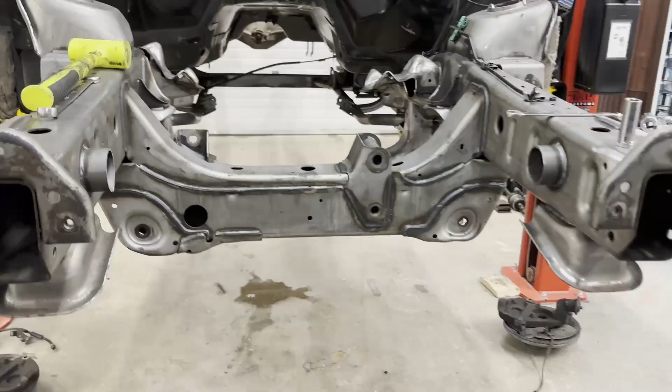The motor and transmission can go in for good. And by good, I mean I'm sure that motor's going to last the summer. But... for good this time.

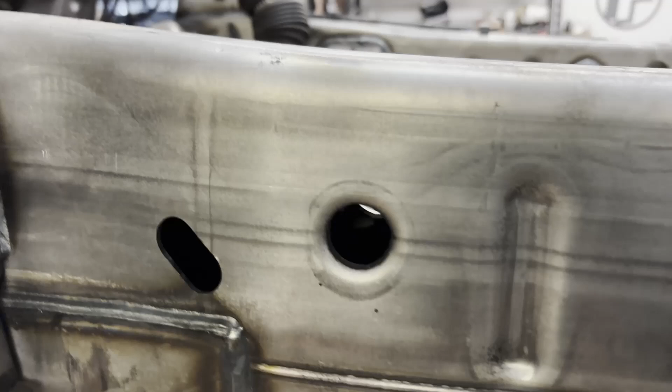So you can see this is all as welded factory steel. Super, super cleaned up.

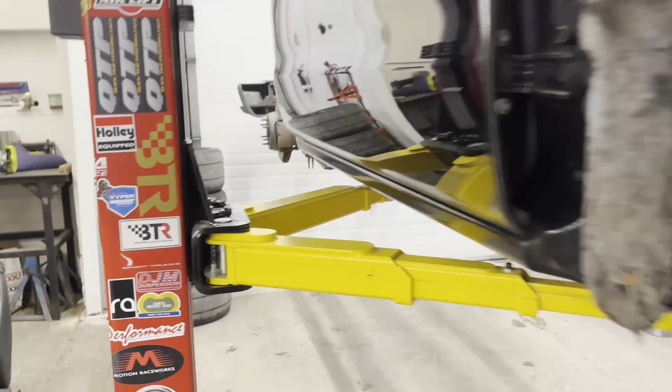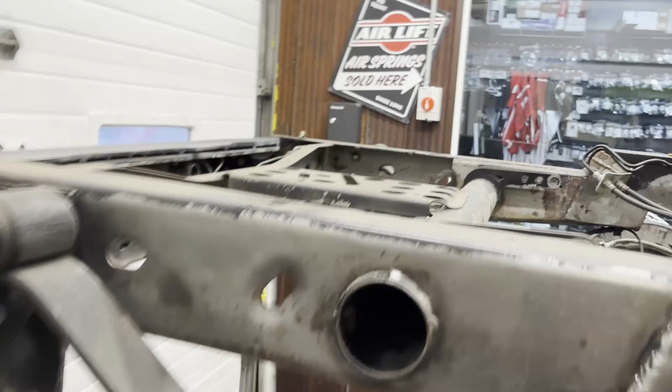Now, obviously we had the bed on when this got blasted, so Carlo wasn't able to get on the top side of the rails, but that's totally fine because about the first winter that I did not drive this truck, I stripped the entire back half by myself and spray painted it. So aside from this little spot here, which is just crusty, this should just sand up really nice and come off. That's pretty much the best case scenario in that. Obviously he wasn't able to get the tops of the rails, which is a problem because thanks to the cage in this unit, this cab is never coming off. So unfortunately that will be like that for the remainder of this truck's life, but it is what it is.

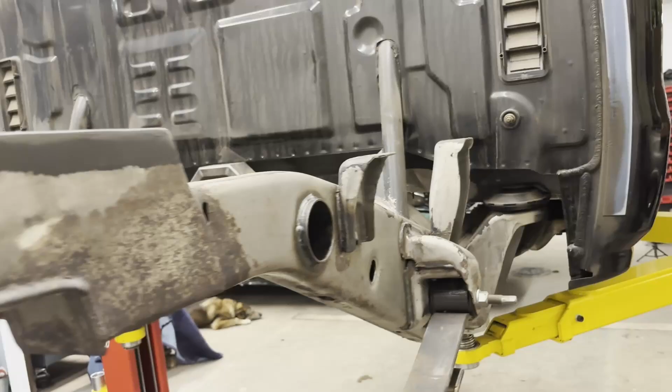Could be much worse. Let's clean the rest of the way now, and we'll show you the floor, which is currently my favorite part. Dun dun dun dun. Well, bam. Look how clean it is. Remember how oily it was, and gooey? This is all the factory E-coat, and it's dry. I mean, there's the tiniest little bit of residue left, but it's dry, it's clean, it's not gooey. I can quick detail this if I really wanted to. That's all just dust from the blasting.

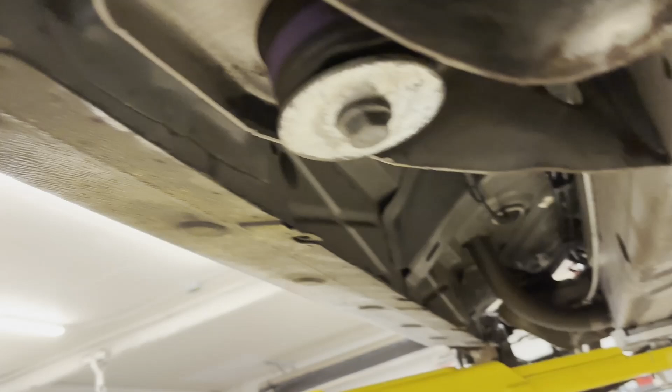So, same here. I'm so happy with this. You got all up in the rockers and everything, so this thing's like brand new again. Aside from a little bit of cleaning and painting, this is the best case scenario I could have asked for.

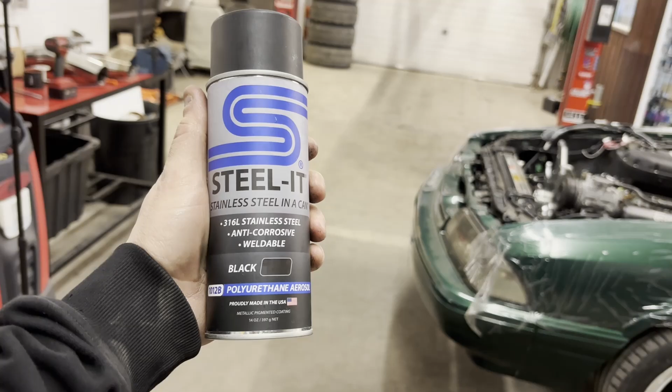So I posted a question on my Instagram stories quite a while ago, asking what aerosol coating to use. And I was bombarded with answers of Steel-It. I'd never heard of it before. Apparently I've been living under a rock because I had 40 or 50 people message me about it. It's incredibly expensive, about 50 bucks Canadian a can, so like 30 odd dollars US. But it has, I guess, stainless steel in it, and it's weldable through the coating. I don't know that I would ever try that, especially with a TIG welder, but it comes highly recommended.

I don't know what my exact game plan is, other than I'm going to try and take this thing apart as much as I can. Hey, look at that, that's from when the CV shaft blew apart. That's fun. And that's from when the other one blew apart.

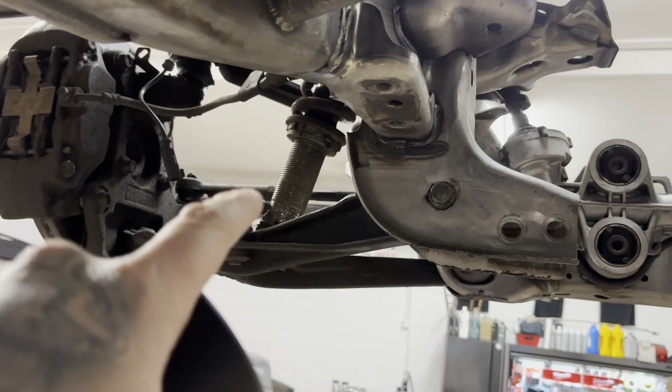So I'm going to take out the front suspension, all of it, disassemble the coilovers. The springs are going to get coated. We're going to clean the shock bodies. The upper mount's going to get coated. The rack's going to come out and get cleaned. Spindles are going to get coated. The brakes are actually painted out of a gun, they're just filthy right now because of the coating, but they are color matched to the car. So those are going to get cleaned up.

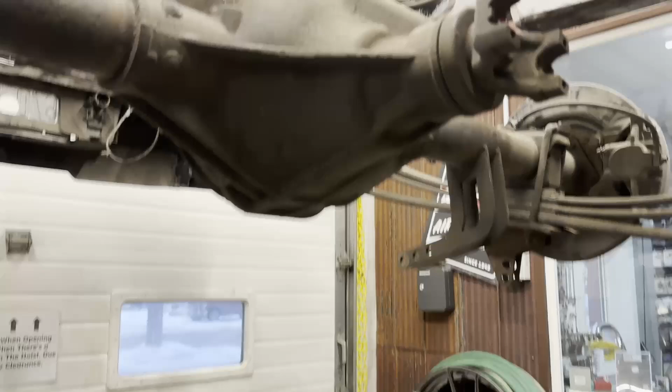This differential, I obviously did not have Carlo blast it because it's not going to be used anymore. So I've got the Ford 9-inch to pick up, I hope, this weekend.

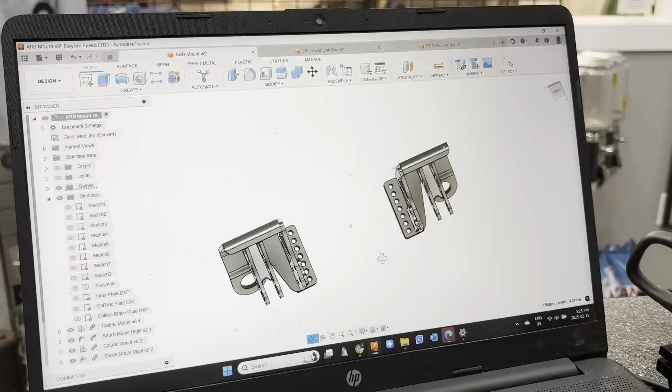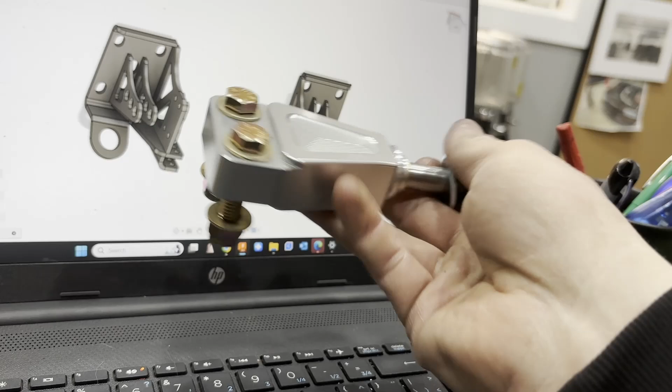And I've also been doing some drawing. I made some anti-roll bar / leaf spring mounts / spring pads, anti-roll bar, shock mount type thing. Basically, picture these being as wide as the diff is - obviously they're far too close right now. This is where my CalTracs are going to bolt on, so we'll have some adjustability there. This will be the new shock mount, which I have these billet shock mounts from Funkhauser race cars to use. So those will bolt into these slotted areas right here, so we've got some adjustability there.

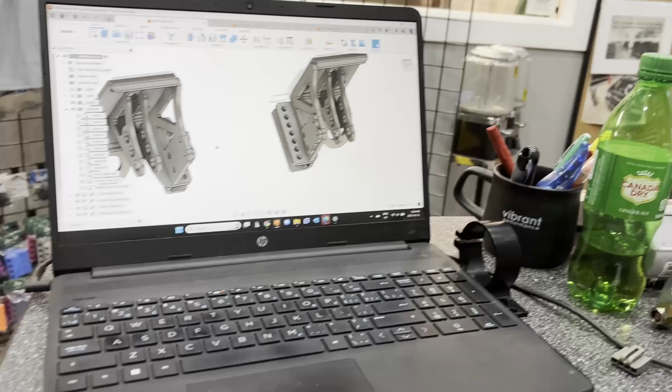And then we'll have a tube that welds to these plates that comes across the diff, and we'll have these mounts attached to that bar. This will be the anti-roll bar, which will then have these sway bar end link type billet pieces that will then have an adjustable bar that goes up to the notch. We're going to remove this cross member here, and make a new DOM tube one that goes across the notch. That's how I'm going to mount the shocks this time - this will be the third shock setup in the rear.

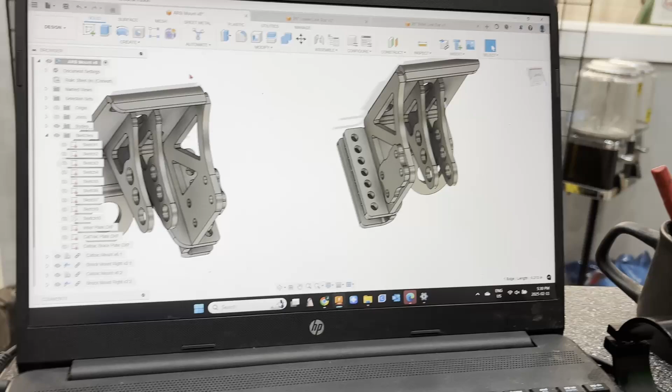So I'm hoping to have these this week and get them coated up, welded up, coated, whatever. Get everything in the truck, be able to make that rear anti-roll bar. Get these billet mounts on, this billet, that billet, all the billet.

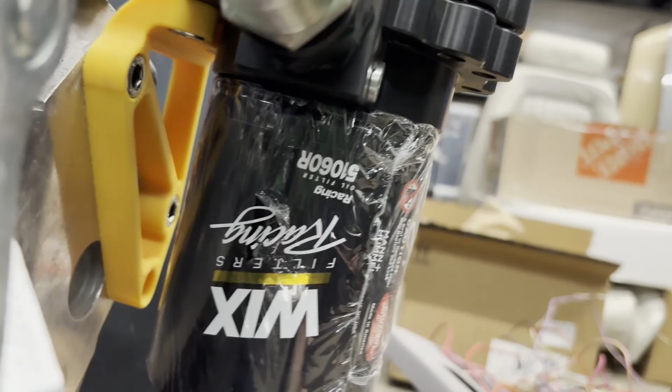What else do I have to show you since we've talked last? I drew our mount for the Clearview filter setup. This is a 3D printed plastic version, obviously, but it's just a proof of concept design that I had. So it's out at Craft Cloud getting 3D printed in China - hopefully I have it pretty soon.

Yeah, okay, I think we're all caught up. All right, teardown time, I guess.

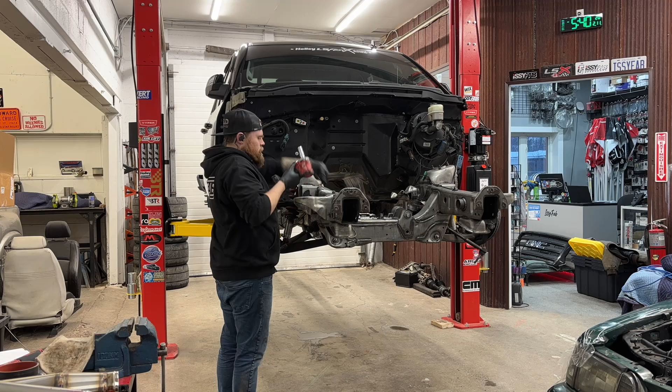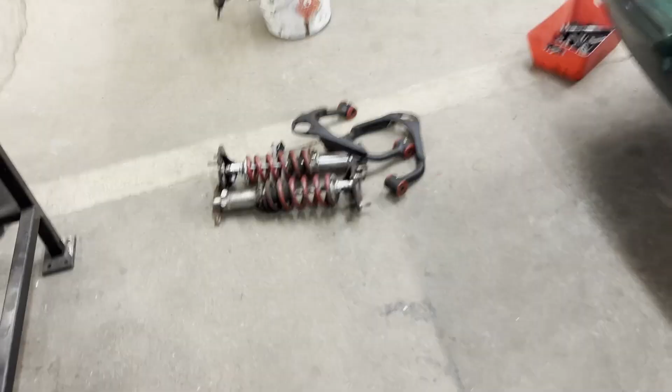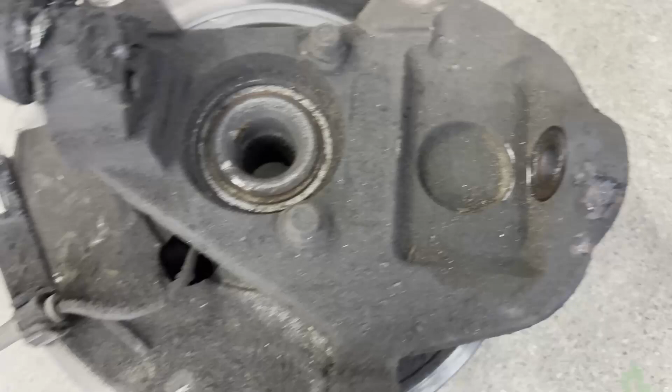I gotta say, I hate doing this, but I'm really glad we're doing it because everything is so bloody gooey. Look at that - that's from one CV shaft exploding and various greases. Control arm's the same - I had drop arms in this thing for a while, but the stock arms have been on it for the majority of the time.

And yeah, the coilovers are pretty much smoked. These aren't even the ones that I used to use - I actually bought these used when I had the other 2014. So I'm just going to clean these up as best I can. I'm going to have the upper mounts powder coated, the coils powder coated, but the shock bodies are basically done, so we're just going to clean them up as best we can for the time being.

And I'll replace them before I start seriously driving this thing again. The majority of the nose is apart. I got to take this brake hose off, obviously still in the caliper, but for all intents and purposes, the front is totally stripped.

So I think the only thing I need to do before I can actually tape off - I'm going to do this chassis in sections. The thought is I could paint a section to start the evening. So say I paint this front cradle area tomorrow night. Obviously I'm not going to be able to work on this front cradle area while it's drying, but if I paint it and leave it for a day, I should be able to work on it.

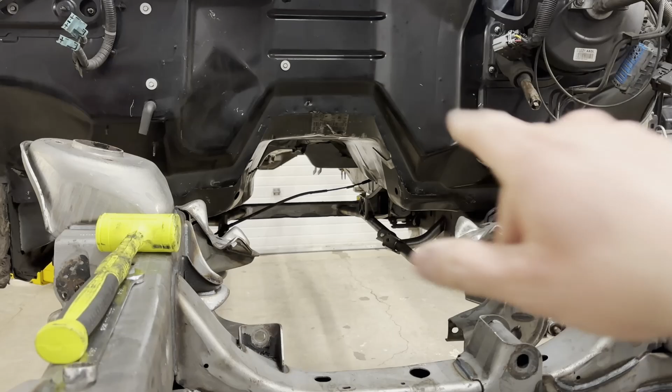Theoretically, if I'm assembling this front end, putting the motor back in, etc., I could paint the next section of frame rail and let it cure for 24 hours while I'm also assembling. I'm hoping this stuff cures okay. I've never used Steelite before, so this is going to be a learning experience.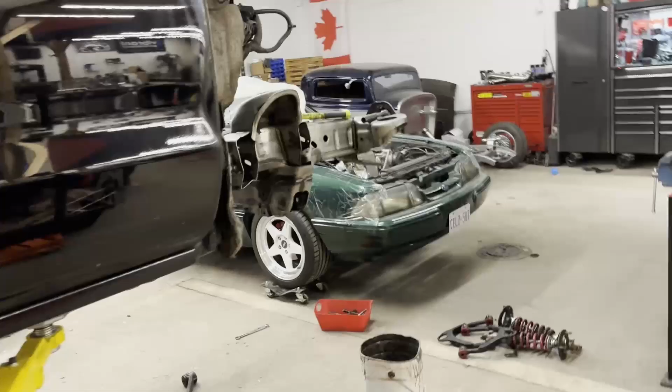But it can't look any worse than what it did. So probably tomorrow night will be chassis cleaning, prepping for paint. The motor and transmission can go in for good once this is painted, which is quite exciting. And by good, I mean I'm sure that motor is going to last the summer.

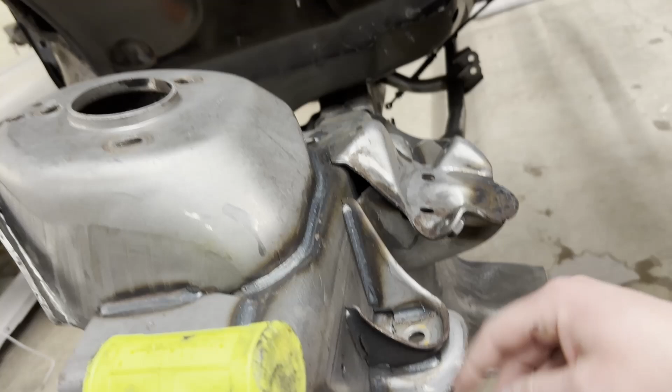But for good this time, I do need to build that turbo drain we spoke about. Hopefully I can set the motor in there and build this turbo drain while all of this stuff is not there. Worst case, I can set the header in and the crossover and set the turbo on kind of loosely, easy enough that I can snake that 3/4 stainless tube in there. I'm hoping I can just weld the tab to the line and maybe drill and tap 10-32 screws through here, wherever it winds up. I can't exactly remember the whole layout with this thing assembled, but I've got to get that turbo drain in. That's a big one before too much goes on.

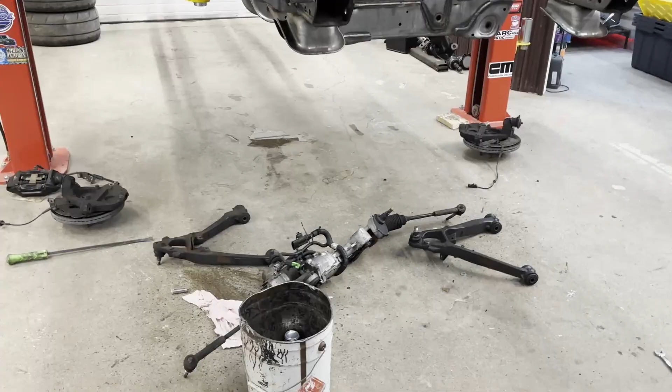The next couple of days are going to kind of suck with cleaning and prepping and painting. That's absolutely my least favorite thing to do. But again, Carlo gave me a phenomenal head start, so it's got to get worse before it gets better. All right, I will catch you later tonight.

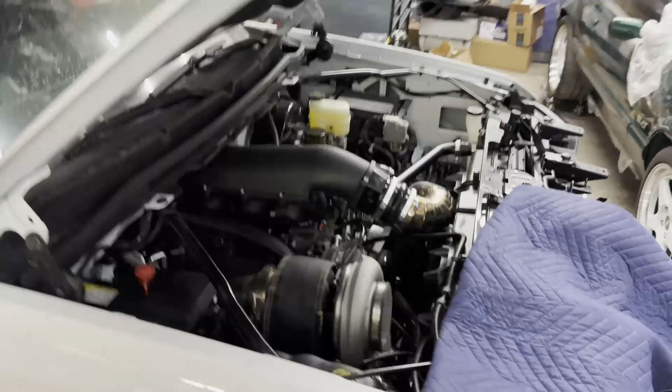Good evening, everyone. We are back again, and she's all stripped. Pardon James's truck, we just put a high rim on this, and I made this charge pipe for him, so it's kind of hanging out. I wound up coming out the other night and just blasting the rest of this thing apart because we had a big snowstorm coming, and I wanted to get this all apart so that James's truck didn't have to go out during the day.

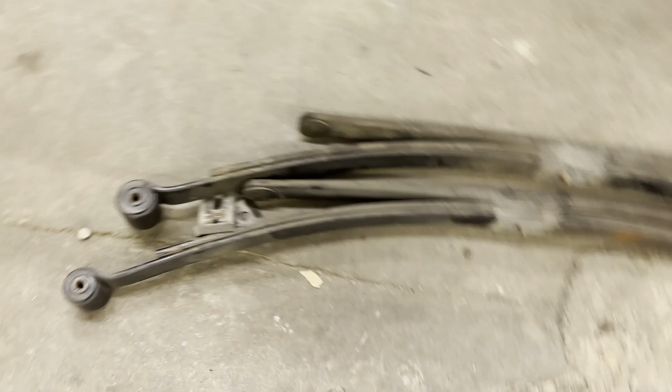And yeah, so truck is clearly very apart. Been slowly picking away at disassembling everything for coating. So that's my pile that's going to get coated. That will be the third and final round of powder coating.

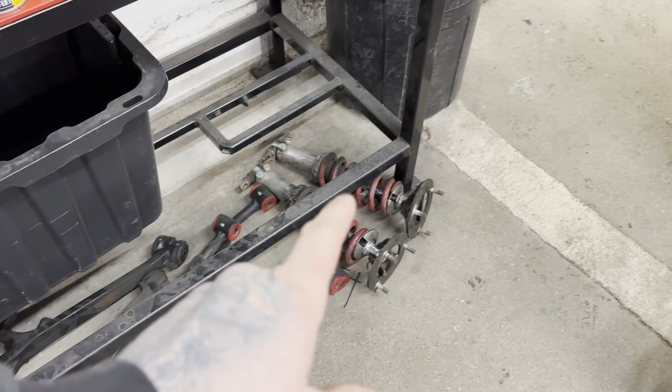Basically I have to get the arms apart still and the coilovers. I am just going to paint these arms. I have found polyurethane bushings for the control arms, but the energy suspension website kind of sucks, and I'm not 100% sure if those bushings are exactly correct. They say they're for 99 to 13, but if you know anything about these trucks, the chassis are the same up to like 19, I think.

So I don't want to risk taking those bushings out and the ones I order, the energy ones, being wrong. So I'm just going to paint them for now. We'll clean them up, paint them, and maybe next winter I'll take them out. Or maybe I'll just order new ones, I don't know. We'll probably just take these ones out because if I order new ones, they come with ball joints and bushings and all that stuff anyway. So, yeah, anyway, that's where we're at with that.

But for tonight, we are going to do a little bit of welding and fitting. I'm putting together an anti-roll bar kit for the truck. I tried to buy two different bolt-in kits for these GM trucks, and nobody wants to sell me one, apparently. So I will just make my own.

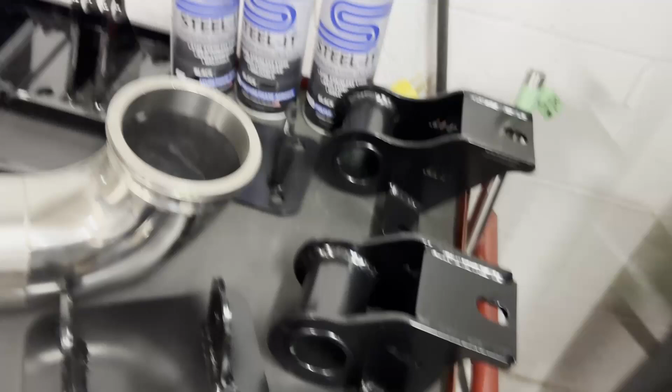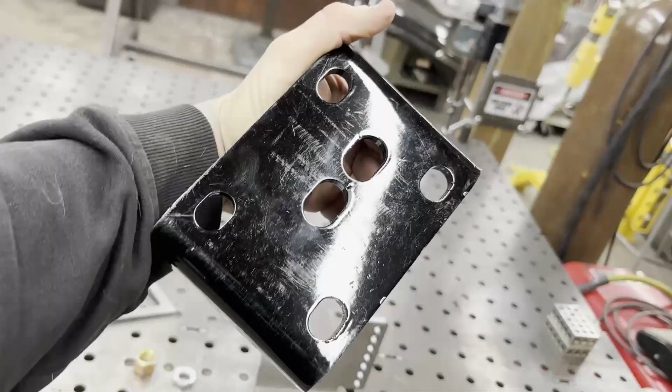This is a leaf spring truck, and I've got Caltracs to go in it. That's the factory Caltrac bracket, so it just sits on the bottom of the diff. U-bolts go through it. Basically what you're looking at here is the same idea. That's the plate for the U-bolts that sits in the diff. I've added tow hooks to it so I can strap this truck down in the trailer from here instead of having to go up over the axle and squish brake lines and all kinds of other stuff.

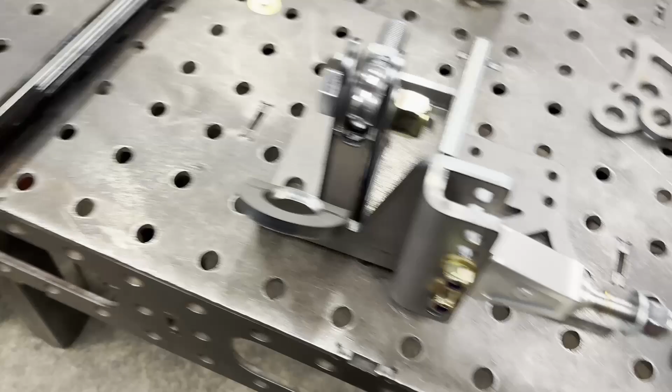And then also, I bought these billet shock mounts from Funkhauser Race Cars. So I've made that, so that's obviously in this piece. And then we've just got another piece that I'm going to weld on here, like so. And that's going to give me some adjustability, even though I probably will never need it. It is kind of race car-y and looks sort of cool. We've got adjustable traction bar mounts.

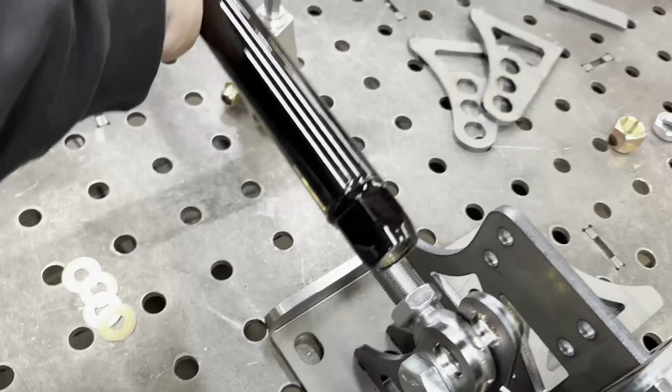Typically, Caltracs work really good, but sometimes you need a bit more bar angle or something like that, so we built some adjustability into that. Basically what you're looking at is that's going to wind up like that, and then that'll attach up to the front of the leaf spring.

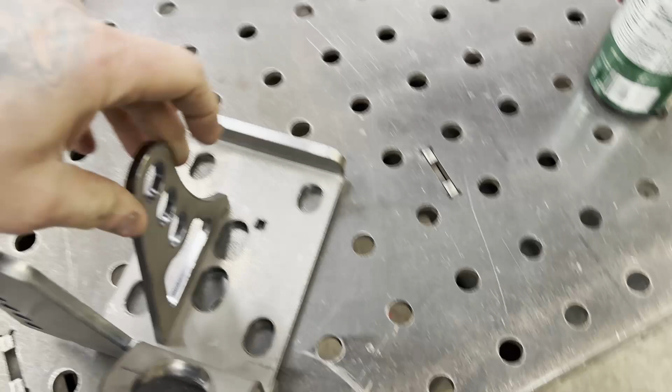Same thing, I put a little locator tab in here so that they just kind of sit in there. And then obviously I'll need to square it up and weld it.

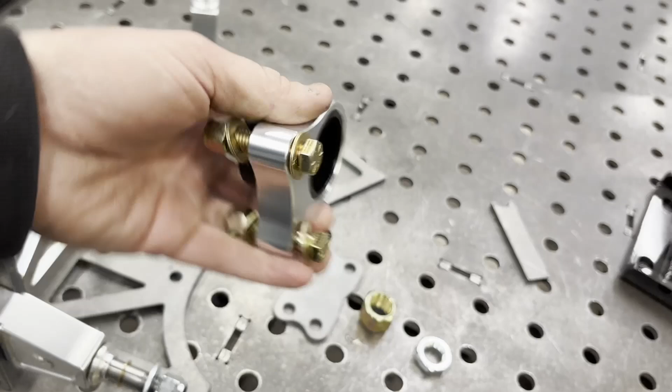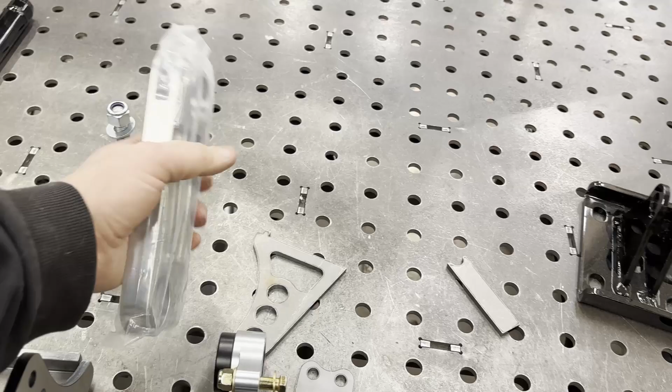These are going to bolt there, and there will be a 1 3/4 tube that runs across between these two under the pumpkin on the diff. And then these will bolt to that bar, which is a stationary bar. Inside here will be another 1 3/4 tube, which will have these billet steel link bars welded to it, and it will act basically as a giant sway bar for the rear.

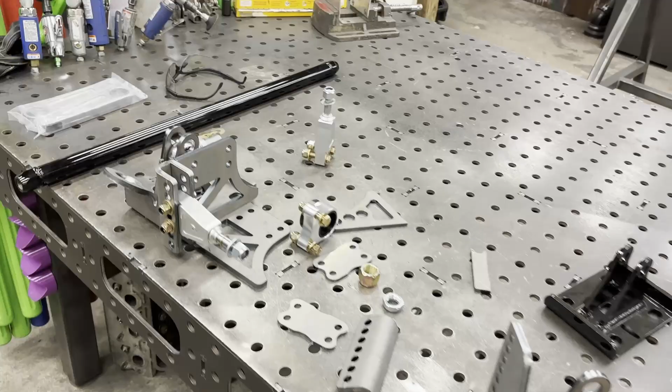If you're unfamiliar with what an anti-roll bar is, it's effectively the same idea as a sway bar, just meant for drag racing. Typically they have zero give, whereas a sway bar does have a bit of give to it and is rubber mounted and whatever.

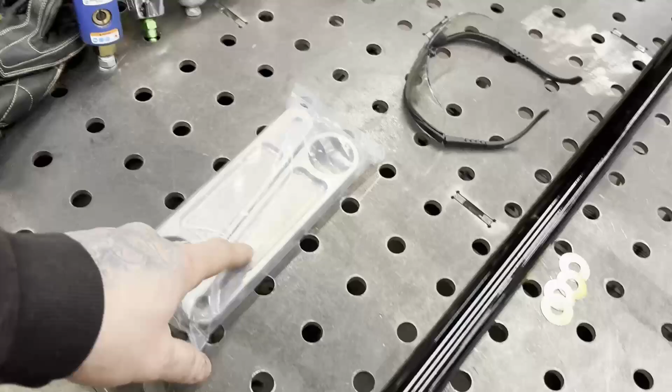This one, these are Delrin bushings, and then we will make off of here some adjustable arms that go up to a tube that will be welded across the top of the notches, or not the very top, but across the notches in between. With the powder coat order, I'm hoping to get these assembled and sent with that order.

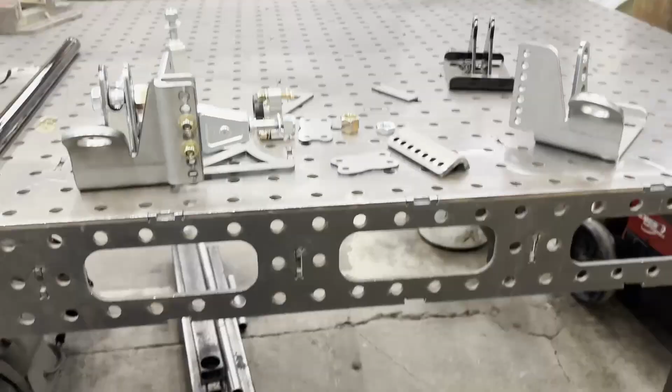I got to come up with some 1 3/4 tube. Hoping to find some 1 3/4 chromoly so we can keep it light. Not that this thing is weight conscious, but if we can keep as much weight out of it as possible, I guess that is a good thing, question mark. So I'm gonna start cleaning all this, and then we'll start welding.

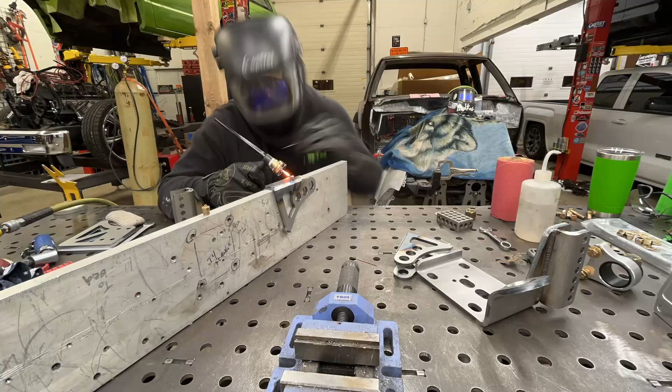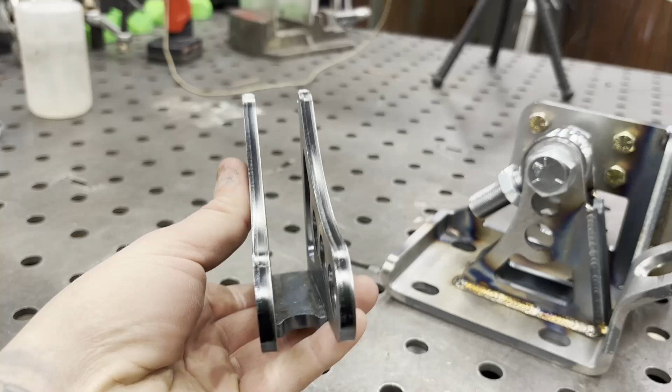We have good news, and we have some maybe not good news. I pulled a bit of a dummy, and I tried to fix this, but I don't know if you can see or not. Anyway, this is tapered slightly, and there's no real fixing it right now, so I'll have to have Chris cut me a couple more tabs.

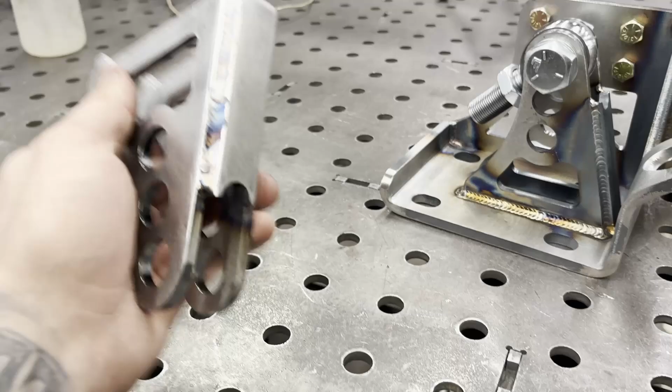I got one welded up. It looks really good. The axle will obviously sit on here. This is the right side, or the passenger side.

This will be the traction bar. This will be that 1 3/4 tube I was mentioning. If you can picture this other one here, like so, there'll be a tube that goes across there.

Is that gonna stand up? Yep. So there'll be a tube that goes across there that has another tube with that little aluminum guy that I showed you earlier, one on either side. And then we'll have the anti-roll bar mounted to that.

Adjustable shock mount. I'm going to MIG weld this joint because this is 5/16 plate, both of these. So I'll MIG weld it, and then I'll blend these into a nice sharp corner.

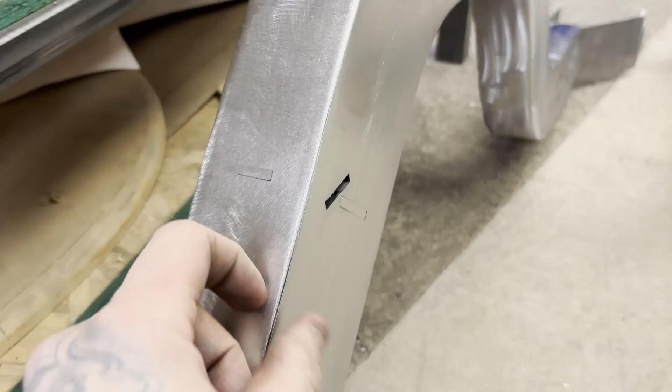Like on these chassis rails here, it'll look something like that. And that will be the end of that one. So I have to get a few other things cut for that chassis anyway, so I'm just gonna have these recut.

I could cut this weld and fix it probably, but it's just easier and far less time consuming to have them recut. Pretty happy with this so far. It's nice to see more things coming to fruition that I dreamed up in my brain.

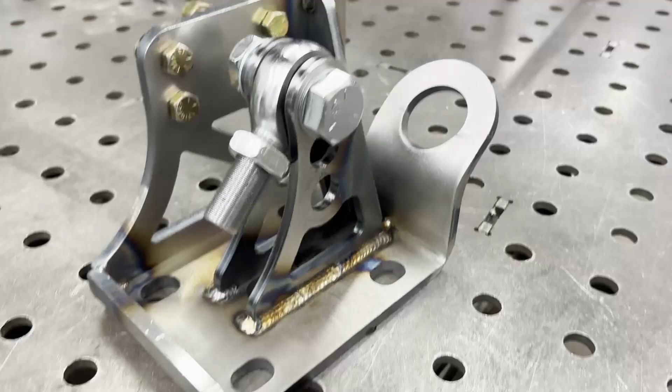So everything's serviceable and neat and tidy, and we got a nice tow loop there. Pretty happy with this. Pretty heavy duty, should be plenty strong.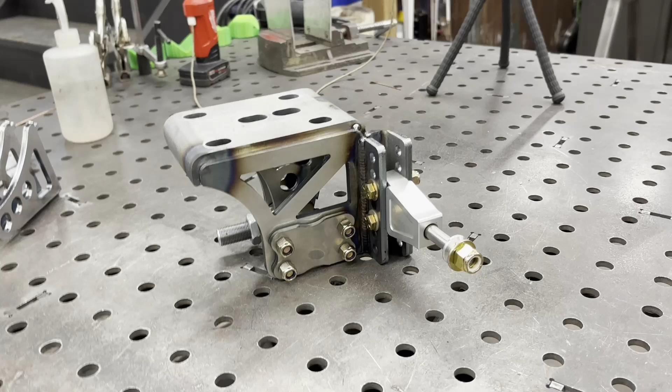And it's going to give us lots of adjustability for traction bar angle, shock height. Yeah, pretty happy with it. So I think I'm going to end this video off here.

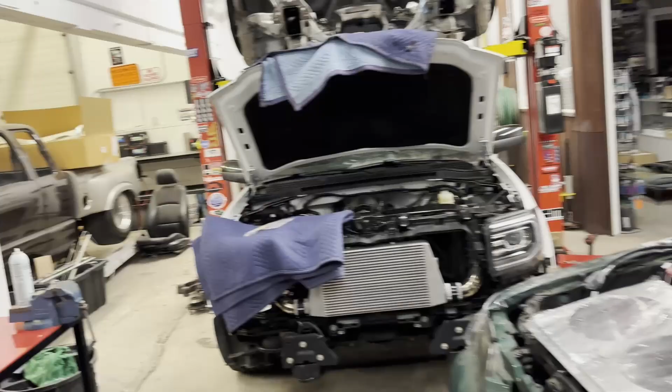Plan for the next one is hopefully sending James's truck home this week. And then we're going to try aggressively to get this chassis painted and start getting stuff back on, because we have a ton of stuff laying around that I'm just kind of sick of looking at. The shop is absolutely a disaster compared to what it normally is, so it'd be nice to start getting some of these things assembled along with getting this thing assembled so that we can get a couple cars sort of de-exploded. So yeah.